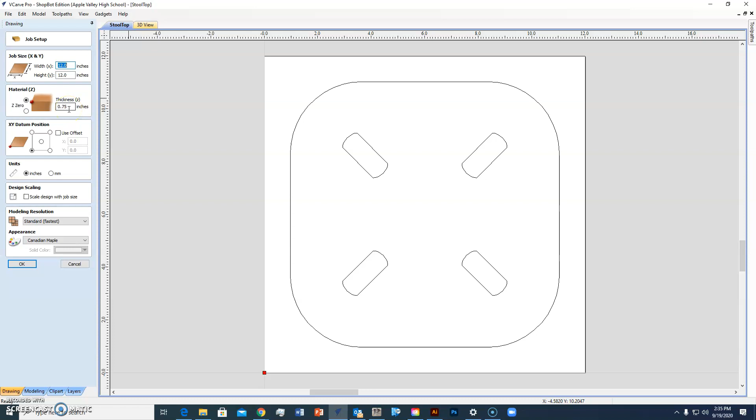We're going to use 0.75, three-quarter inch plywood, and what's already set up for you is where the pockets are that the legs are going to fit into the stool. That's what you see here. You're going to delete these because we're going to cut the other side for your image, but you need that as a reference because they cut into the wood about halfway through, so make sure your pocket doesn't cut into it.

Now what I'm going to do is get an image. I'm going to go over to Google in Chrome, and I've already searched for an image. I went to St. Olaf College, and I'd like to have the St. Olaf logo on my stool, but I'm not going to use the real detailed one. I'm going to use one that's really simple.

So this is the one I've already downloaded. I right-clicked on it, did Save Image As, and you can see I saved it in the Advanced Fab Lab folder that I've created. So that's ready to go.

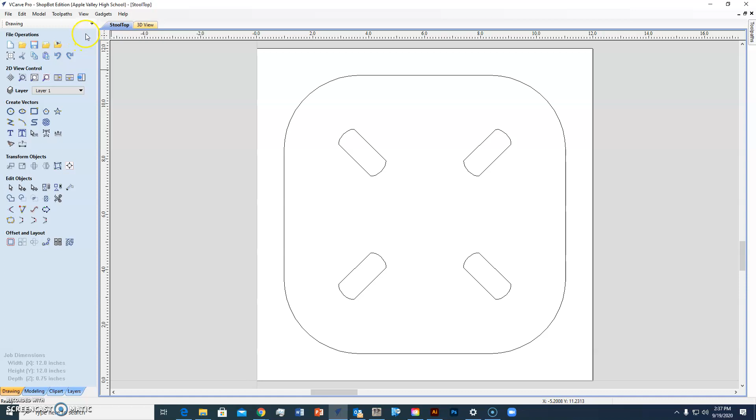Now I'm going to go back into VCarve Pro, and just like we did on our cutting board activity, I'm going to go into Import Bitmap, and I renamed it, so this is the one I'm going to bring in. I'm going to open it, and you'll see I'm probably going to resize it so it's as big as it can be.

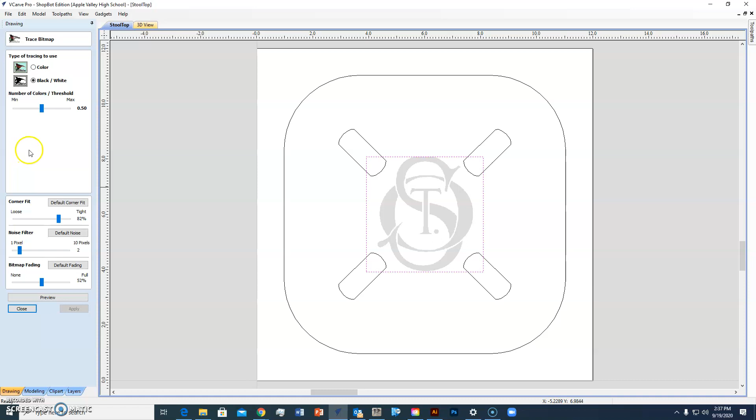So I'm going to go to the bird for tracing the bitmap and go down to preview. That looks pretty good, I'll be able to expand it in a minute. I'm going to hit apply and close, and then move the image off to the side because I don't need that anymore.

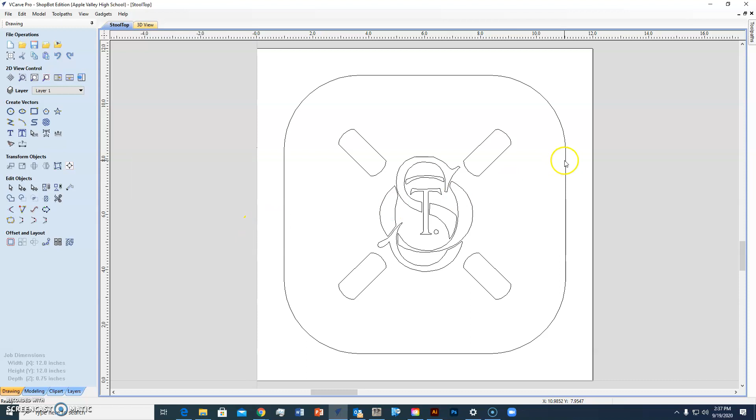I'm going to hit the delete key, and now this is the vectors that I want to work with. So I'm going to hold the shift key and select all these vectors, and then I'm going to make them bigger.

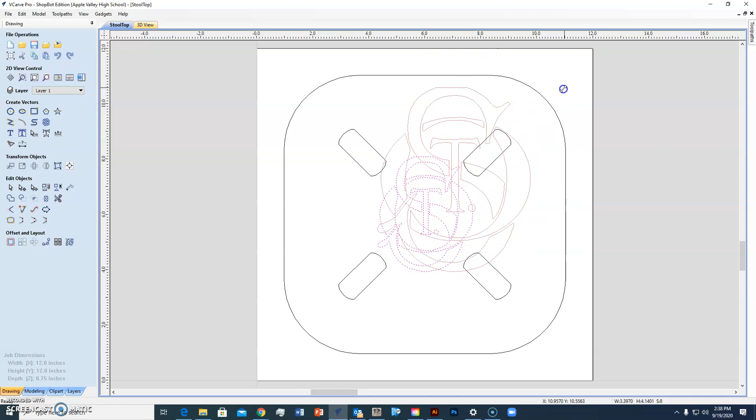I'm going to click on the image and kind of rescale it. You can also use this tool to move it. This tool sets the object size, or you can just grab a corner too.

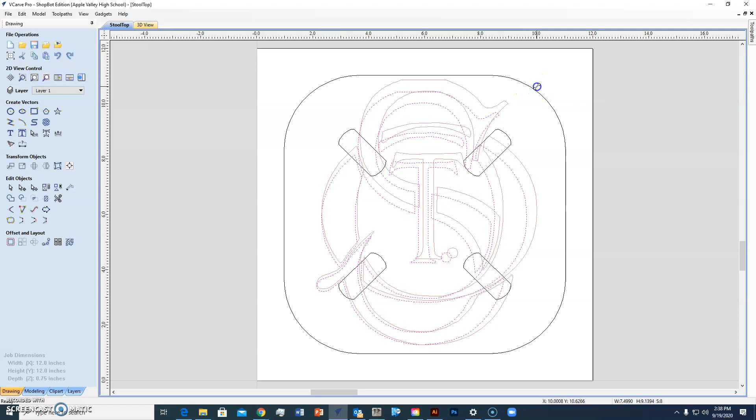Almost got it as big as I want it. What I'm going to do now is go as close to the edge as I can, because when I toolpath it, I'm going to toolpath on the inside of it. Another thing you can do is center it.

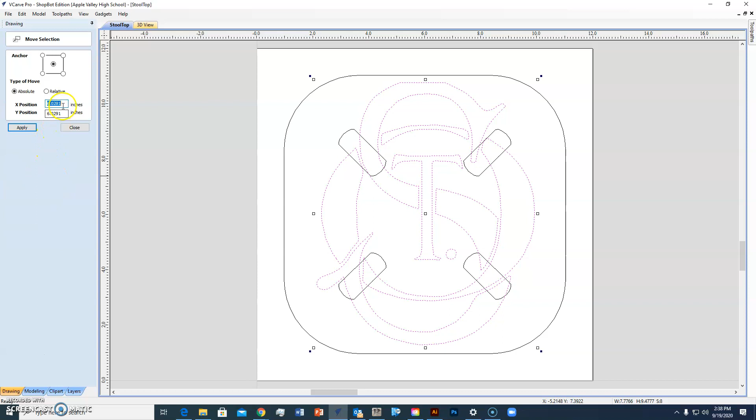My workspace is 12 by 12, so I'm going to make sure it's exactly in the center. I'm going to go 6 and 6. So it's pretty close, and then hit apply, and now it's right in the center of everything.

Next thing I can do is see where this is going to cut, so I can get rid of these. I'm going to delete those pockets and just make sure I'm only going to cut down about 1/8 of an inch. I'm going to hit the delete key for that.

Now I'm going to toolpath, starting with the image. I'm going to select all, hold the shift key and unselect the outside part. Last time we did the profile toolpath, now I'm going to do a pocket toolpath. So I'm going to select that.

For cut depth, I don't want to go very far, maybe 1/8 of an inch, which is 0.125 inches. It's picking the wrong tool bit, so I have to go into the tool bit and change it to the downcut bit, and then click OK.

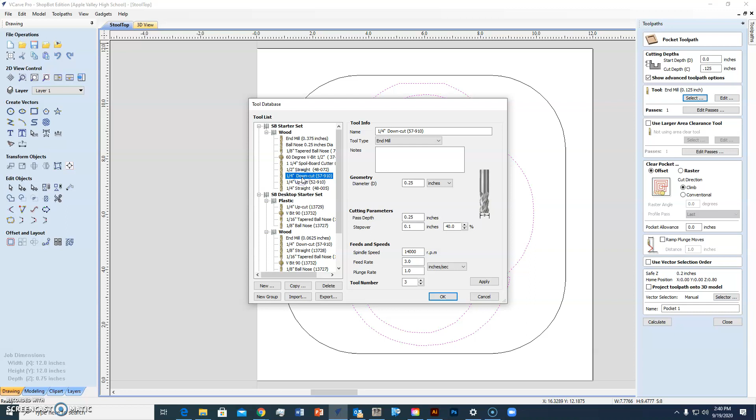It's going to take 1 pass since it's not going down very far. That looks good, so I'll hit calculate and see how it looks. Yeah, it doesn't look too good. If you look at the real image, it can't get this part.

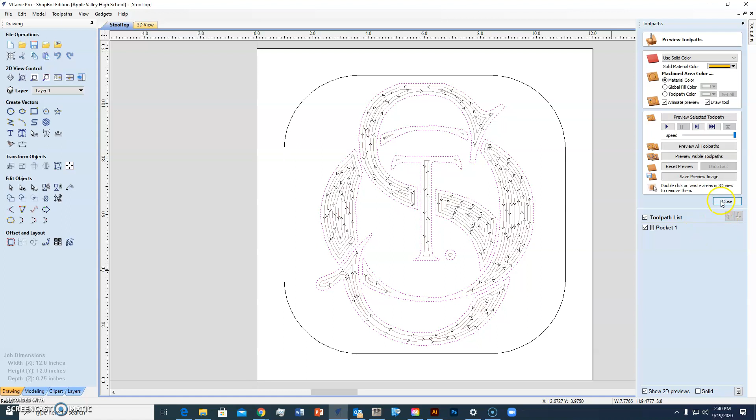So I think I'm going to change my pocket tool path a little bit, maybe make this even bigger than it is. I'll turn that off so I can see my image, then select everything again using the shift key to not select that outside part, and make it a little bit bigger to see if that can clean things up.

I've already toolpathed, so what I'll be able to do when I re-toolpath is use a button that re-toolpaths everything. This is going to be almost to the edge, so I'll drop it down a little bit and then we'll try re-toolpathing.

So if you go to this button, let's see where it is - recalculate all toolpaths. I'm going to turn that back on and recalculate. It tells me it recalculated all of them. Now we'll see, though I still don't think it's going to be able to get into here.

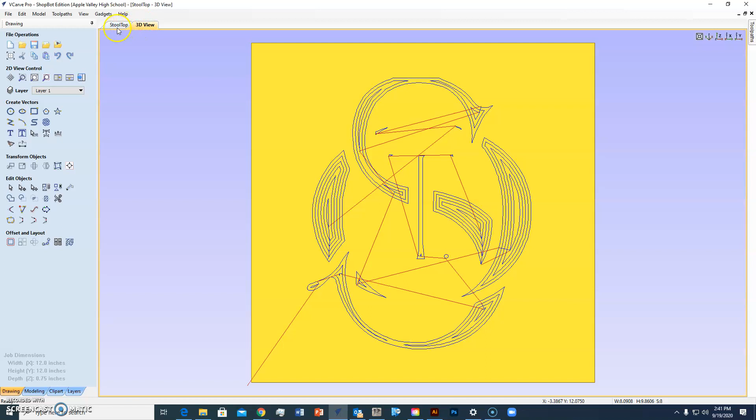Yep, not going to get into that spot. So I'm going to turn this off, and on this part I may change to a different approach because I want this to show up and I want this to show up, so I'm going to select both of those and do a profile tool path that goes down the same depth, 0.125, using a downcut bit, cutting on the inside of those lines, then hit calculate.

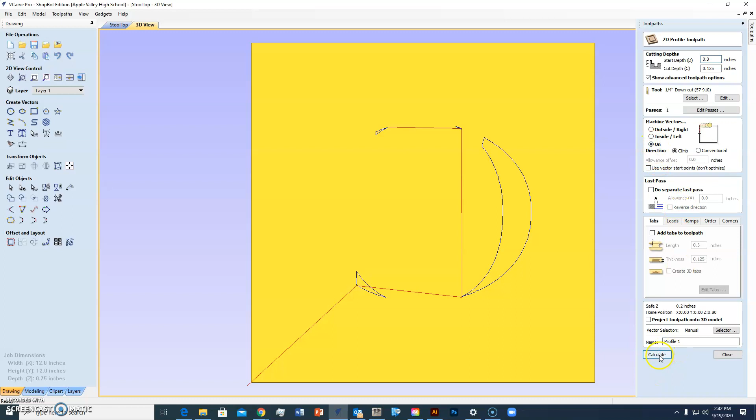Still didn't do it. So I guess what I'll do on this profile is cut on the line and see if it does anything. On, hit calculate. That worked. So it's going to be a little bit wider, probably a bit wider than normal.

Now if I look at everything, turning on all the profiles, that looks pretty good. I'm happy with that, so I'm going to close everything. This button actually shows you how long it's going to take - it's only going to take about 3 minutes.

Now I'm ready to save the design file and save the toolpath file. But the last thing I've got to do is toolpath this, and that's going to be another profile toolpath, only this time we have to cut all the way through, and that's going to be 0.8 because our wood is 3/4 of an inch thick.

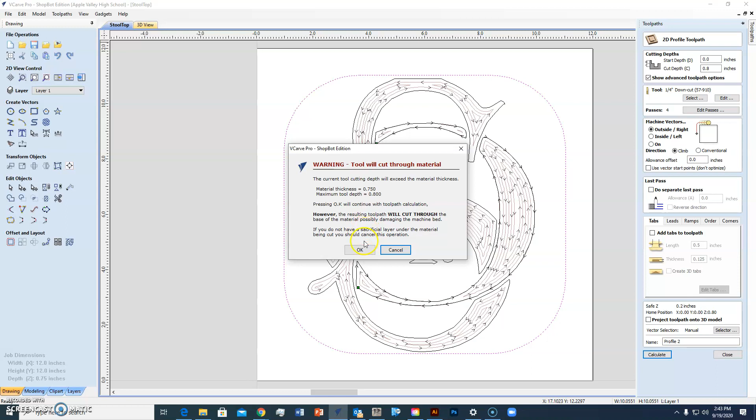So that's going to take 4 trips around. I want to cut on the outside, right. I'm going to hit calculate. It tells me it's going to cut all the way through. I'm fine with that, and that's what it's going to look like.

You may want to add in a tab too, so I'll probably go back to this and add a tab so it doesn't shift around. So it put in a tab here and a tab here. That's good, I added 2 tabs. Now that's ready to cut.

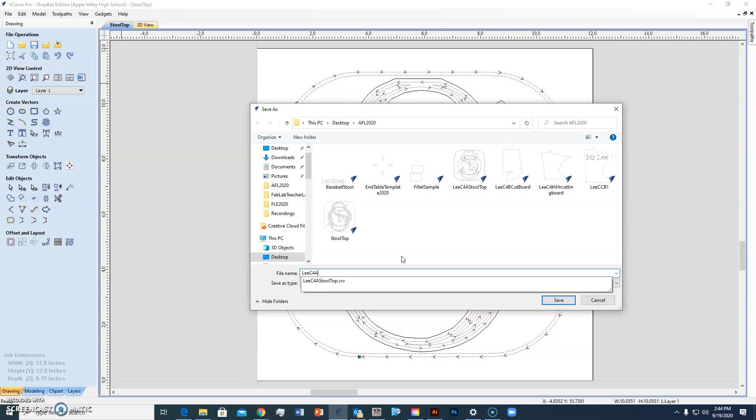So I'm going to save the file as - with my last name, first initial, the class or cohort I'm in, 4A, and then Stool. I'll save that to where I can upload it to Schoology.

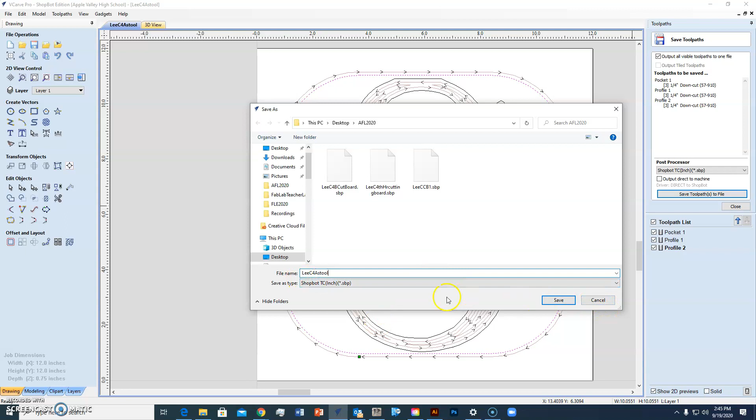You can also save the toolpath file if you'd like, but remember, I'm going to be checking that. You can save it the same way - comes up with that, only now it's going to be a ShopBot file. So I'll hit save, and now I'm ready to cut it.

So I hope that made sense. You saw how I had to change my design a little bit each time because the tool pathing didn't look the way I wanted it to. And that's kind of how you do it. So have a nice day.